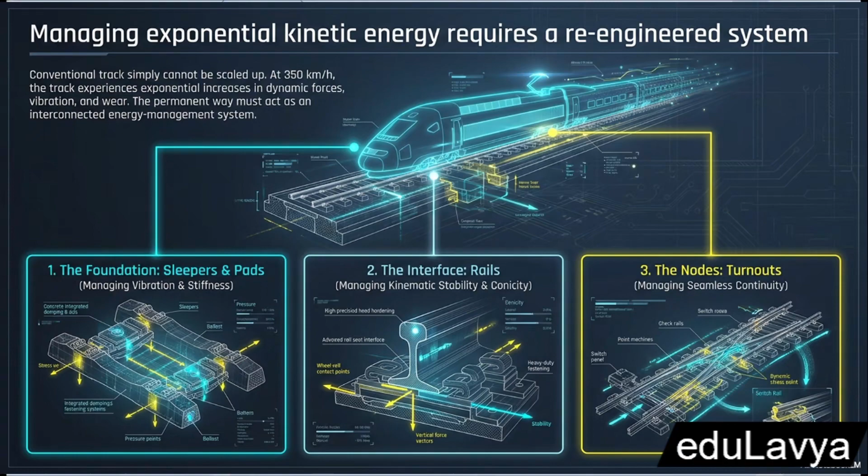Let's kick things off by establishing our foundational thesis here. High-speed rail isn't just about fast trains. It's an incredibly complex interlocking system. The infrastructure, the rolling stock, the operating conditions, they all have to work in absolute perfect harmony. Because if even one of those elements fails to meet the standard, the entire system is compromised.

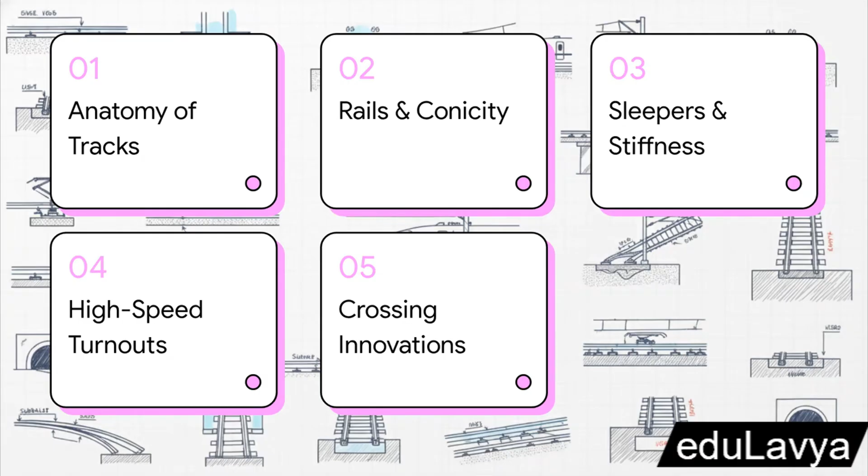Here's our syllabus for today. We'll start with the anatomy of high-speed tracks, move on to rail welding and conicity, dive into sleepers, fastenings, and stiffness, explore how we navigate high-speed turnouts, and finish up with some amazing innovations in crossing design.

Okay, Section 1, Anatomy of High-Speed Tracks, the Invisible Infrastructure. Let's get into it. So, before we even touch on materials, we have to talk geometry. The 1435 millimeter standard gauge is essentially the universal canvas for high-speed engineering. Now, while conventional tracks in places like India might use a broader gauge, this standard gauge is universally chosen by high-speed pioneers worldwide. Why? Because of its proven utility and seamless interchangeability across global networks. It is literally the foundation of fast travel.

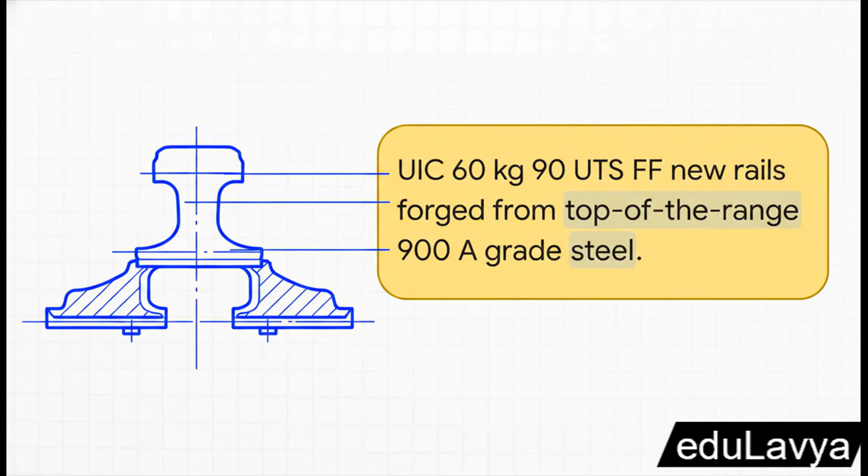Section 2. Rails, welding and conicity, guiding the bullet. The absolute most crucial point here: you can't just throw down standard iron and call it a day. For these speeds, you need exceptionally strong 60-kilogram UIC rails, crafted from top-tier 900A grade steel. When you're dealing with the extreme dynamic forces of a train going over 300 kilometers per hour, the quality of that steel must be absolute. We're talking rigorous, microscopic attention to assembly and surface defect monitoring.

But how do you solve the massive vibration problem? Well, engineers use continuous welded rail, or CWR. See, by avoiding standard joint lengths of around 36 meters, they effectively prevent critical, destructive wavelengths. They take standard lengths, like 25 meters in Japan or up to 108 meters in France, and weld them together into one continuous, seamless track. By entirely eliminating those traditional gaps, you dramatically improve the ride quality and practically slash the noise profile of the track. It's a total game changer.

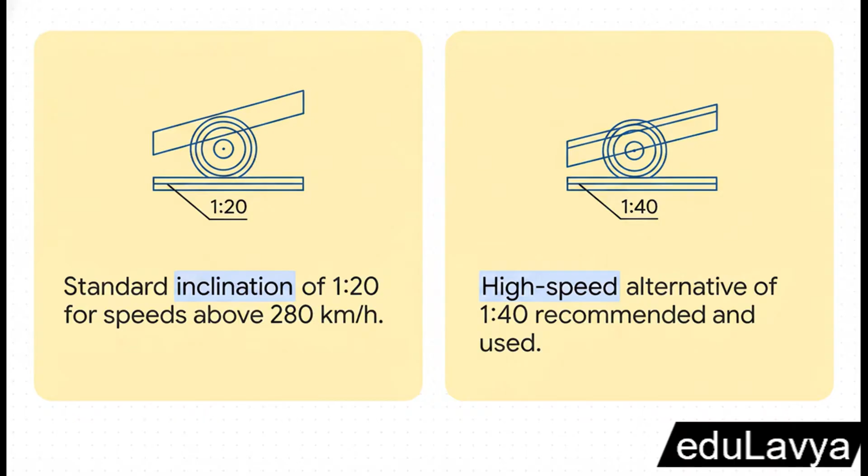Now, laying the track perfectly flat just isn't going to cut it. To keep the train perfectly centered at those insane speeds, the rails are actually tilted slightly inward. Traditionally, a 1 in 20 inclination is heavily recommended for speeds over 280 kilometers per hour. But networks in countries like Germany have successfully pioneered a flatter 1 in 40 inclination to fine-tune stability for their specific systems. Pretty neat, right?

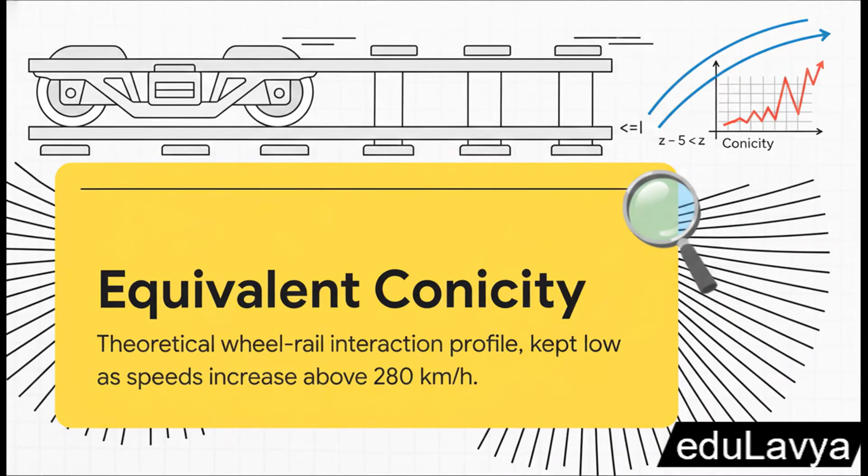And that brings us to equivalent conicity. This is a really fascinating concept. Think of it as the theoretical, mathematical relationship between the shape of the wheel and the shape of the rail. As speeds crank up, this interaction profile has to be meticulously monitored and kept as low as possible to maintain stability. If this number creeps up at extreme velocities, the train can actually begin to hunt, or wildly oscillate side to side, which, as you can imagine, is incredibly dangerous.

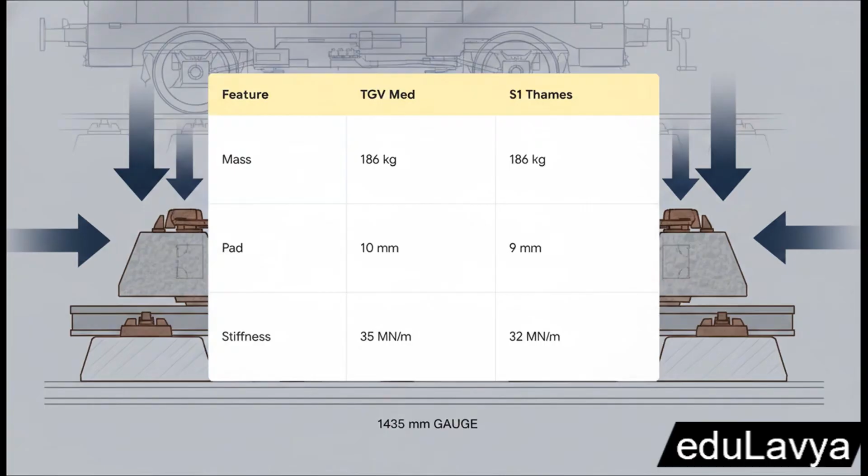But here's the catch. You can't just bolt raw steel directly to concrete. Sitting right between the rail and the sleeper is the unsung hero of the permanent way, the rubber rail pad. Networks like France's SNCF actually swap these out depending on their goals.

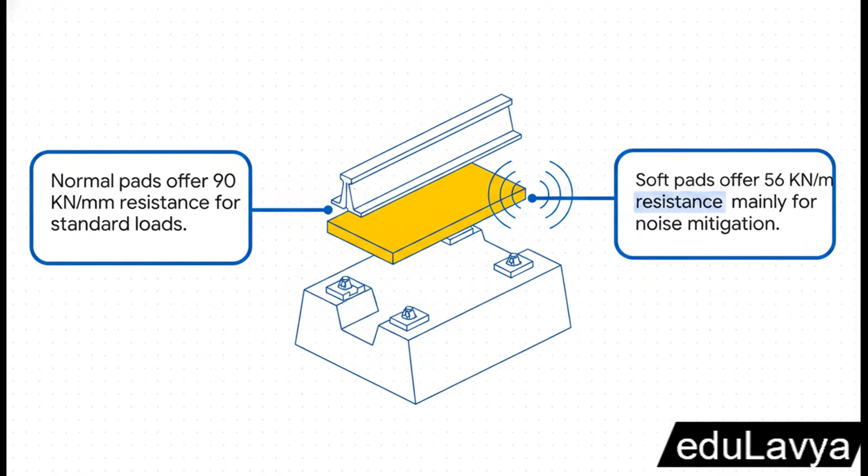They might use a normal pad with 90 kilonewtons per millimeter of resistance for standard load distribution, or if they're near a town, they might fine-tune it down to 56 kilonewtons per millimeter with a much softer pad, specifically to deaden the roar of the passing train.

So the ultimate goal here is finding the absolute Goldilocks zone for the whole track assembly. The optimum overall track stiffness is engineered precisely to 78 kilonewtons per millimeter for trains traveling at 300 kilometers per hour. And I mean precisely. This isn't just a random guess. It is a painstakingly calculated variable that ensures the train glides perfectly instead of violently bouncing down the line.

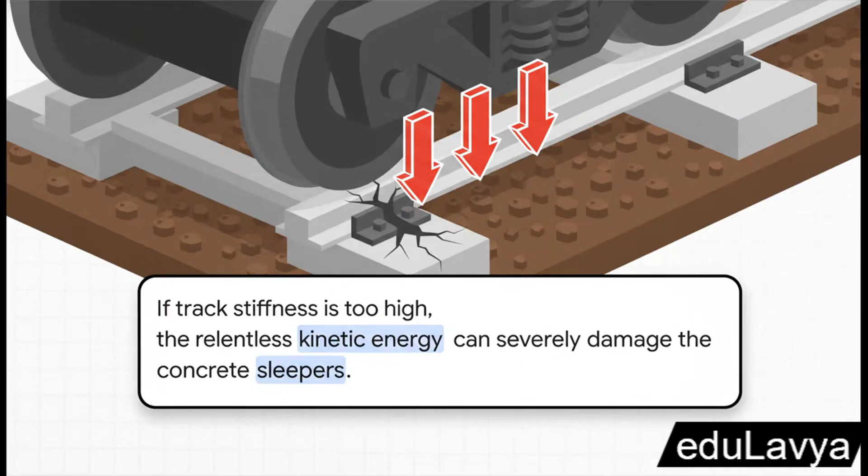Why does that exact 78 number matter so much? Well, if the dynamic rigidity is too stiff, the raw physical force of the train simply won't be absorbed by the rubber or the ballast. Instead, all that violent kinetic energy transfers directly downward, and it will literally shatter the concrete sleepers into pieces. If it's too soft, the track deforms, too stiff, and it breaks. It has to be perfect.

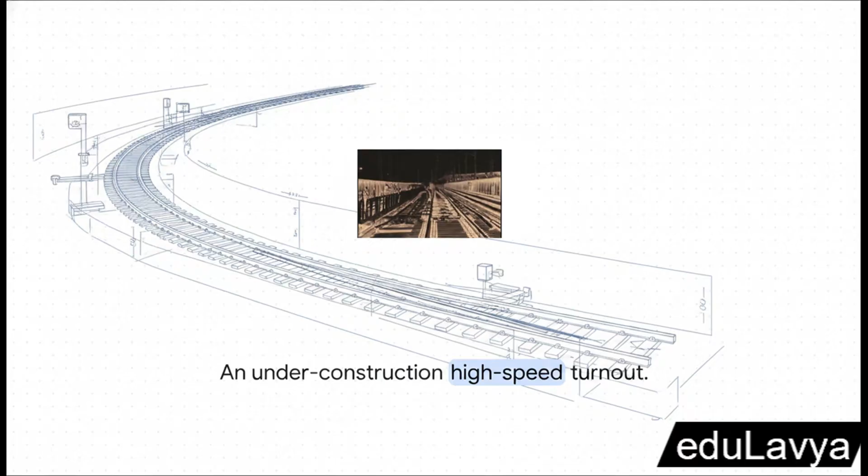All right, Section 4, navigating high-speed turnouts, changing lanes at 300 kilometers per hour. Just look at this visually incredible layout of a turnout under construction. It really puts into perspective just how long and gradual these track diversions have to be. When you're moving at high speed, making a sharp turn is physically impossible because of the immense lateral acceleration forces. So the switch entry angle has to be exceptionally small, which stretches the entire turnout over a massive distance.

Notice the sheer mechanical density required here. See, the absence of superelevation, or cant, on these turnouts means cant deficiency becomes the single most important safety criteria. Because the track can't bank into the turn like it would on a normal curve, the components themselves have to be ridiculously robust to handle those unmitigated lateral forces.

To combat those intense lateral forces without that helpful banking effect, engineers use something called tangential curved switches. This produces an incredibly flat entry angle. By dropping that angle of attack, the track drastically lowers the lateral forces, which effectively eliminates that awful jolting sensation you get on older, slower trains. It means a passenger can be sipping coffee at 300 kilometers per hour and barely even notice they just changed lanes.

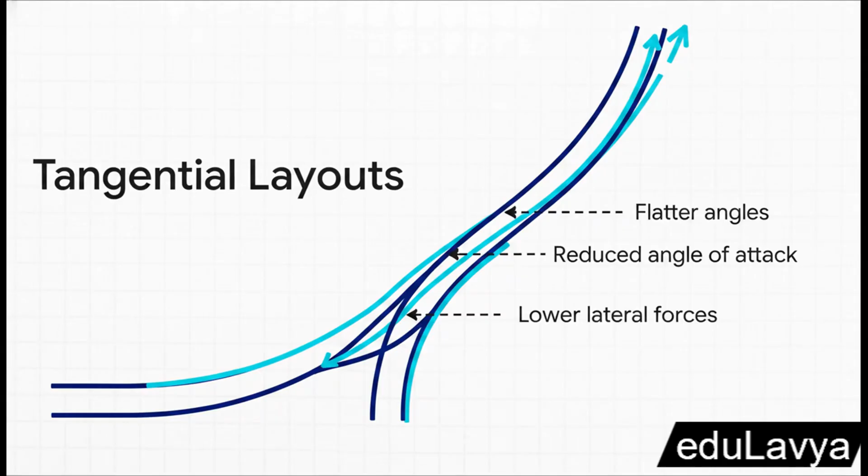And finally, Section 5, innovations in crossing design, the future of frictionless travel. So, how do we make all this sophisticated tech a bit more environmentally friendly? Companies like Vossloh Cogifer are deploying these amazing lubrication-free systems. They're completely getting rid of the heavy, polluting greases that used to be standard for track switches.

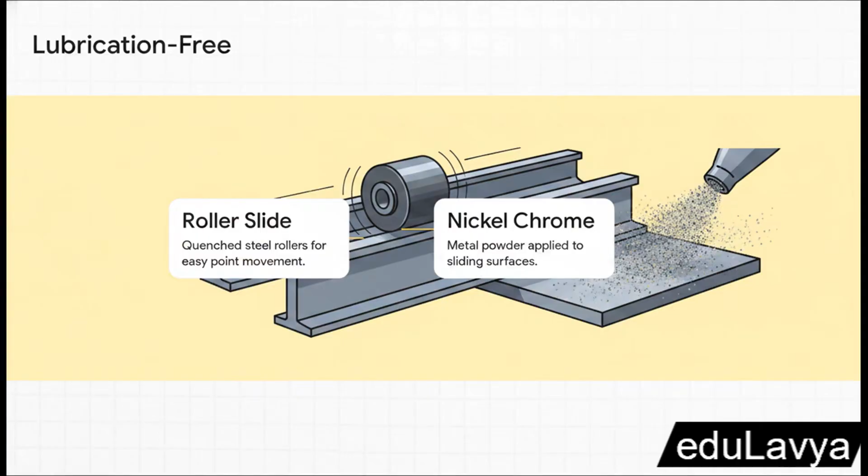They do this by either using quenched steel rollers that let the heavy rail slide mechanically, or through some truly wild surface treatments, where a high nickel and chrome metal powder is blasted onto the sliding surfaces at ultra-high speeds. No grease required. Check out the heavy mechanical components in this turnout setup.

To handle the immense stress localized here, engineers use highly specialized synthetic rail pads and non-greasing base plates, all custom designed to dampen the extreme vibrations of the switch assembly. Every single clip, every pad, every plate is meticulously chosen to keep that track geometry absolutely pristine.

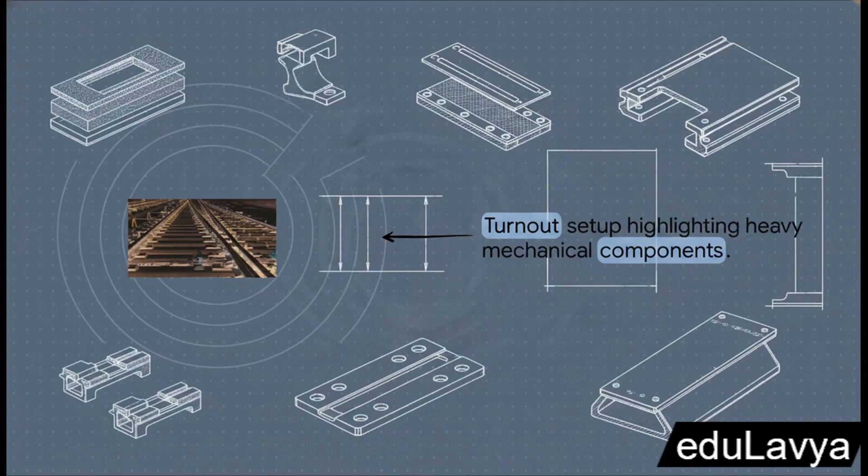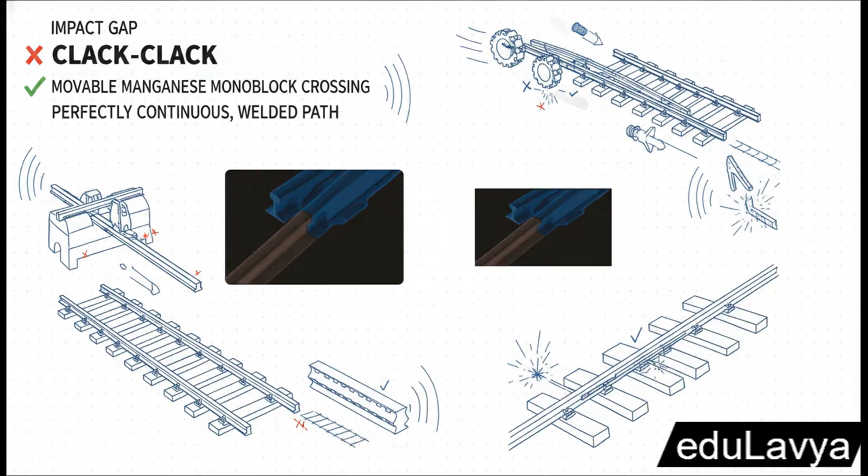You know that loud clack-clack sound you hear when a train switches tracks? That's the sound of the wheel hitting the impact gap of a conventional crossing. To eliminate that violent gap entirely, engineers came up with the movable manganese monoblock crossing. The internal block literally physically shifts and locks into place, creating a perfectly continuous, welded path for the wheel to roll over.

And the result of all this incredible, seamless manganese hardware: trains are safely permitted to blast straight through these highly complex track sections at a staggering 320 kilometers per hour. And they do it without tearing the switch or themselves apart.

It's honestly mind-blowing. We always look up at the sleek aerodynamic trains, but I really hope this explainer leaves you wondering just how much further can we push the hidden engineering of the track beneath them. The permanent way. It's not just static metal and concrete. It's a finely tuned, highly dynamic machine that makes the impossible possible.